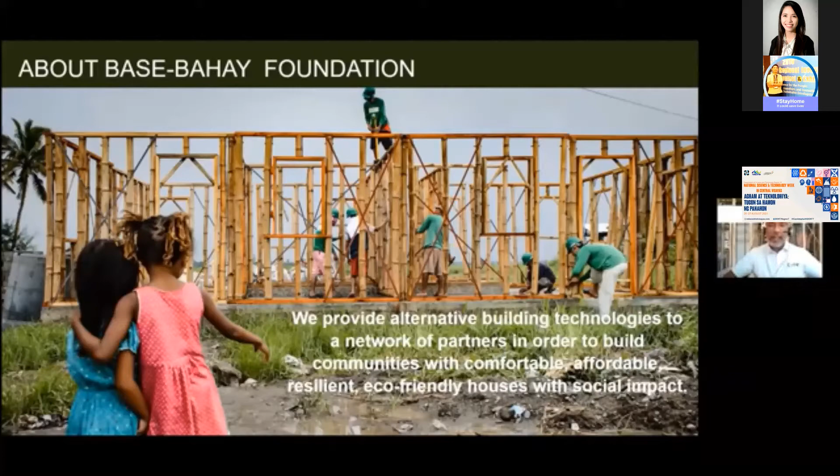Let me tell you a little bit about Base Bahay Foundation first. Actually, the topic bamboo is very close to my heart because bamboo is a material of our advocacy in Base Bahay. We are a non-profit organization and we provide alternative building technologies to a network of partners so that we can build communities with comfortable, affordable, resilient, and eco-friendly houses with social impact. Base Bahay actually started as a research project of German students in 2011. They studied bamboo, coconut, and other low energy resource materials as building construction materials. They did the characterization of the material, and then they piloted it into a house.

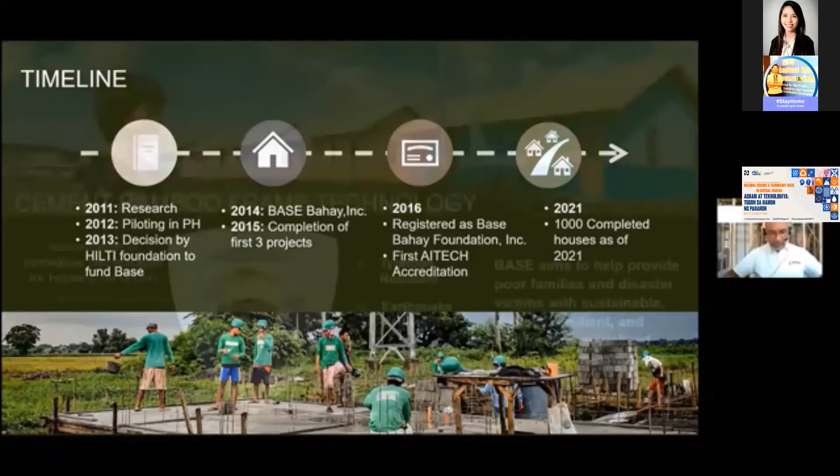Through that study, the Hilti Foundation, the CSR arm of the Hilti Group, decided to create Base Bahay. And from there, we started building houses, socialized housing, housing for the poor. And now in 2021, we have already completed more than 1,000 houses all over the Philippines. I will show you some video and pictures of some of our projects. The technology that I'm talking about is an eco-friendly, green building technology because it uses bamboo in its entirety, and we call it the cement bamboo frame technology. The building technology per se is accredited by the National Housing Authority through the AITECH, the accreditation of innovative technology for housing.

We build communities, houses for poor families, disaster-stricken communities, and the marginalized sector of the society. We build socialized housing, a house that is permanent with a lifespan, as accredited by AITECH or the National Housing Authority, of 25 to 50 years. So it must be typhoon resistant, able to resist wind speeds up to 240 kilometers per hour, earthquake resistant to a magnitude of 7, fire resistant and insect resistant, so that it can last from 25 to 50 years.

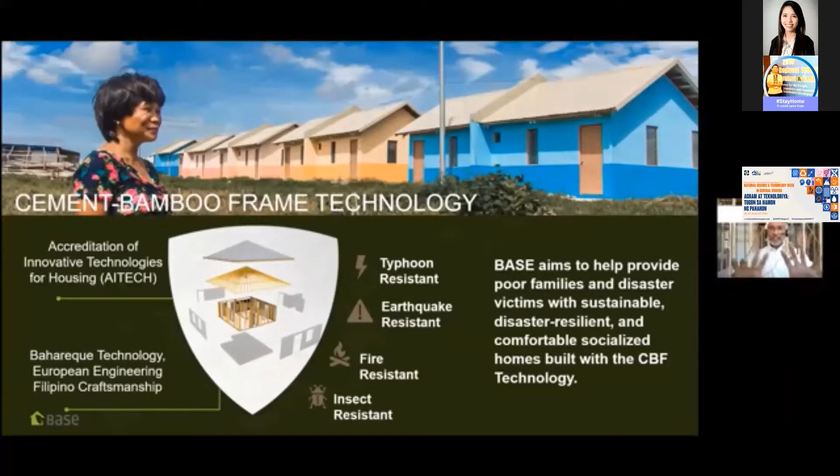Just like what I have said, this is one sample of a community in Tacloban. We have already built 12 communities like this, and we have constructed more than 1,000 houses. We have projects in Jaro, Iloilo, Lanit, Basey, Samar, Tacloban, in Kabug, in Eastern Samar, Sorsogon, and just very recently in Negros Occidental, Silay. And we are constructing more socialized housing across the Philippines. Among our ongoing projects, we have two projects in Mindanao, wherein we are now redesigning the architectural features of the houses, much different from what we have already built. We're working with groups like Hineleban Foundation, Rotary Homes, Ayala Land, and even the group of Architect Ray Villanueva in the Kawayan Collective in building their Dauin House, which I think will be presented later today.

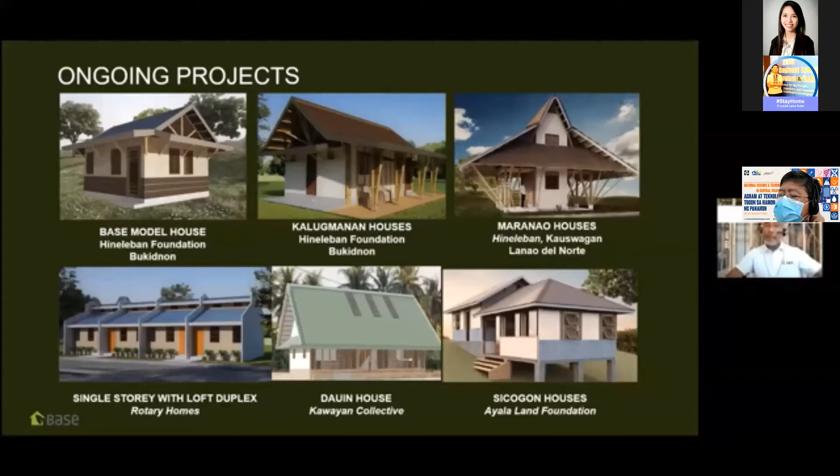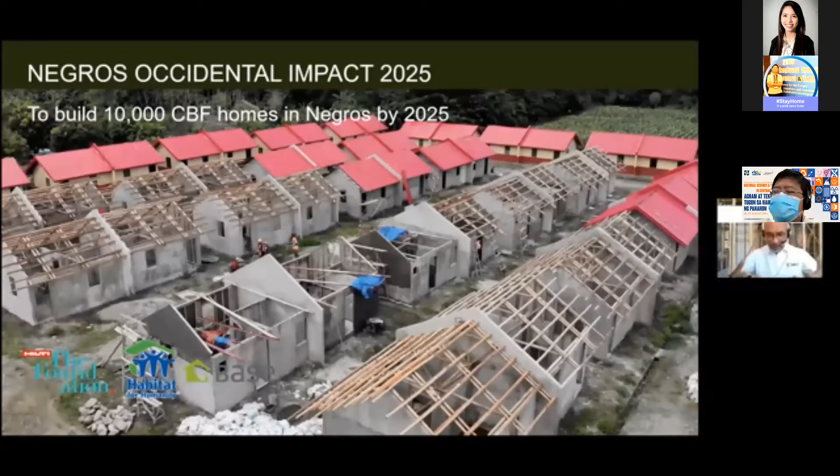As I have said, one of our biggest projects in Negros is the Negros Occidental Impact 2025. We plan to build 10,000 cement bamboo frame houses in Negros by 2025, serving informal settlers and displaced families in a resettlement area close to the urban district. Allow me to show you a 5-minute video clip of the project, the use of the bamboo material in building technology, and the social impact it brings.

I hope the sound will be okay for everyone. Here goes.

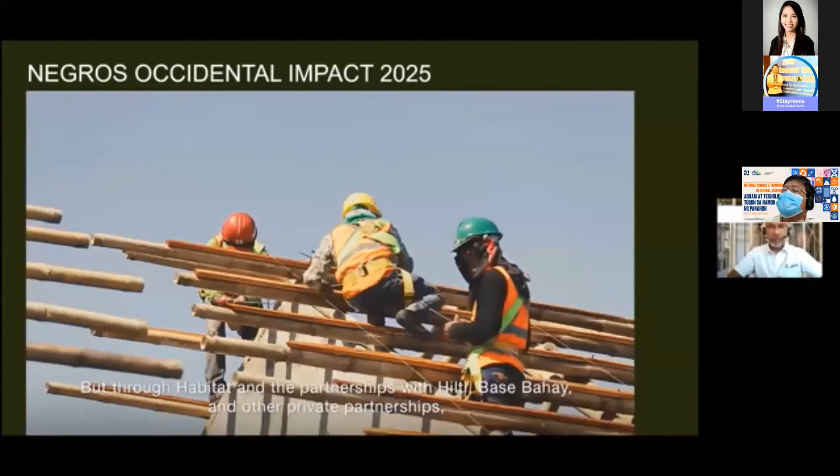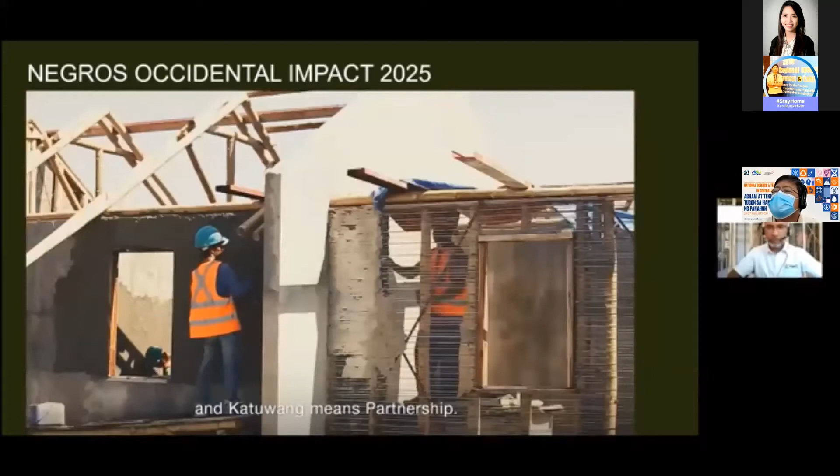When we first started here, it was just land. The land was appropriated basically for informal settlers to provide their own housing. But through Habitat and the partnerships with Hilti, Base Bahay, and other private partnerships, we're building sustainable communities. The first community here is calling itself Katuwang. And Katuwang means partnership. But partnership, it's more of a deeper partnership. It's like partnership for life.

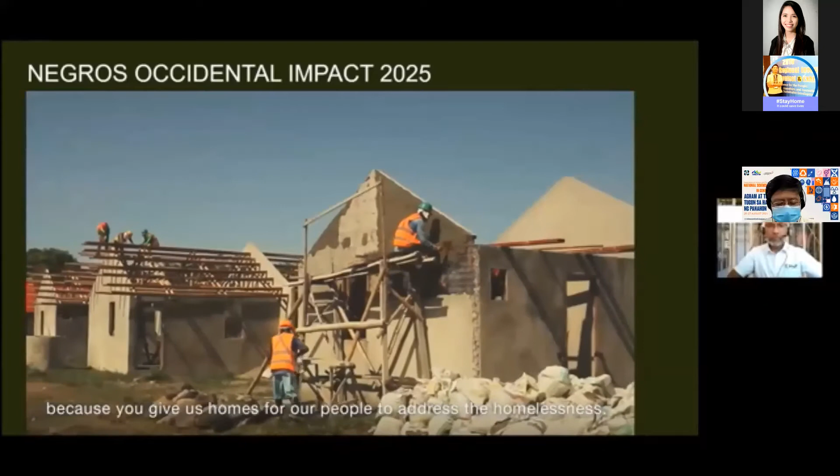It's good to be partners with Habitat because you give us homes for our people to address the homelessness, and so in return we should be helpful in what you are doing here so that we can show to other places that what we are doing here in partnership with Habitat is a good example for the city of Silay.

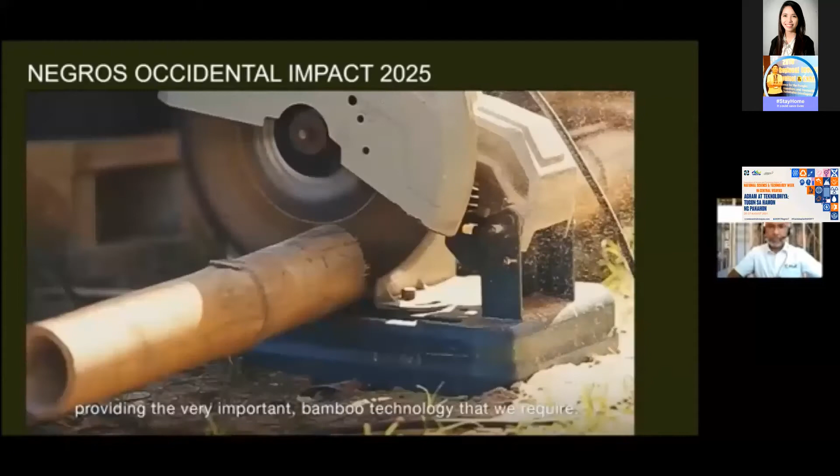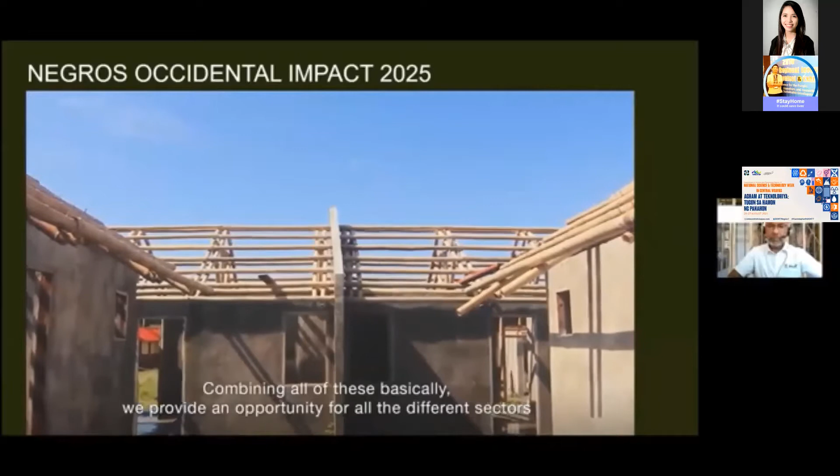So the partnership focuses basically on leveraging public and private organizations. We have included the LGU, who provides us land. We have the private sector that provides us basically funding and support. More importantly, we also have partnerships with the Hilti Foundation and Base Bahay, providing the very important technology, bamboo technology, that we require. Combining all of these, we provide an opportunity for all the different sectors in the housing value chain to contribute to eliminating housing poverty.

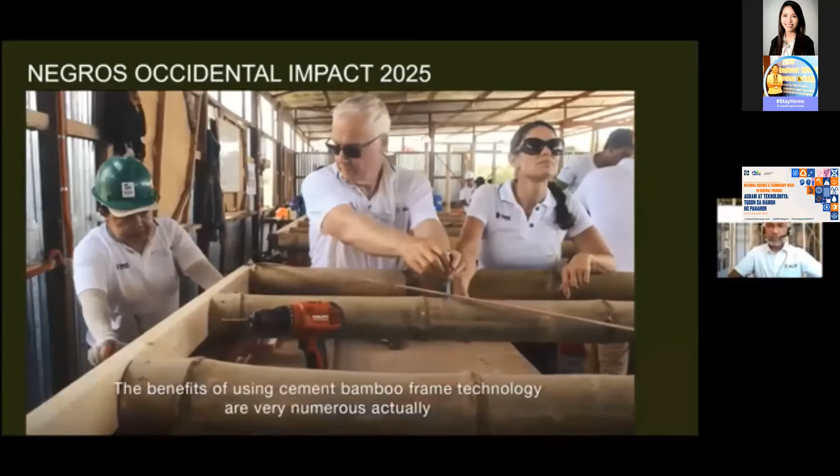The benefits of using cement bamboo frame technology are very numerous, actually. First and foremost, it provides for the building of disaster-resilient houses, which can basically withstand typhoons and earthquakes, which is very important for the very vulnerable groups. The second, it's also been proven that it provides insulation from heat, which is very important for poor families.

Third, it provides employment, not only for construction workers, but for bamboo farmers, which is very critical for the rural areas. Another benefit is the sustainability of the product. It grows very quick. So unlike wood or any other material in the construction value chain, it's easy to source, and it can also be much more cheaply sourced in the long term through economies of scale.

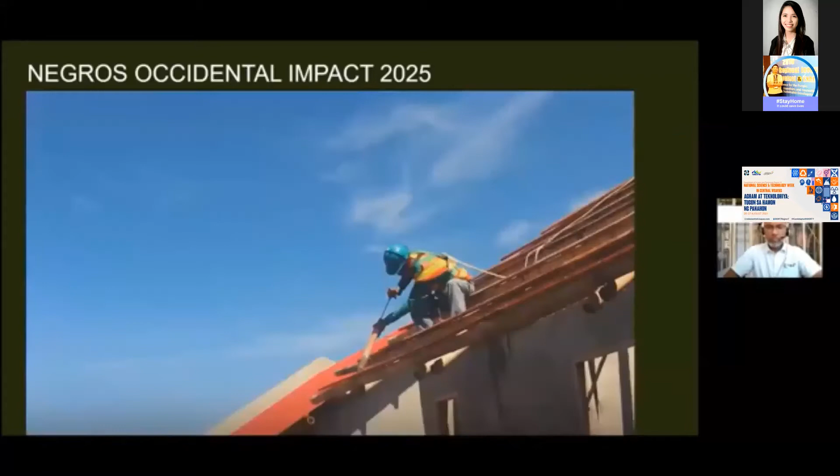Yes, it is worth doing again because it can help us through the livelihood of our city and also the people of Silay.

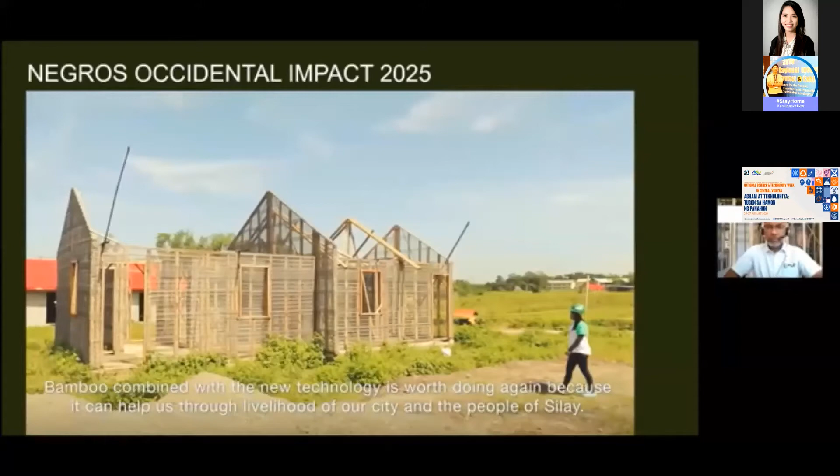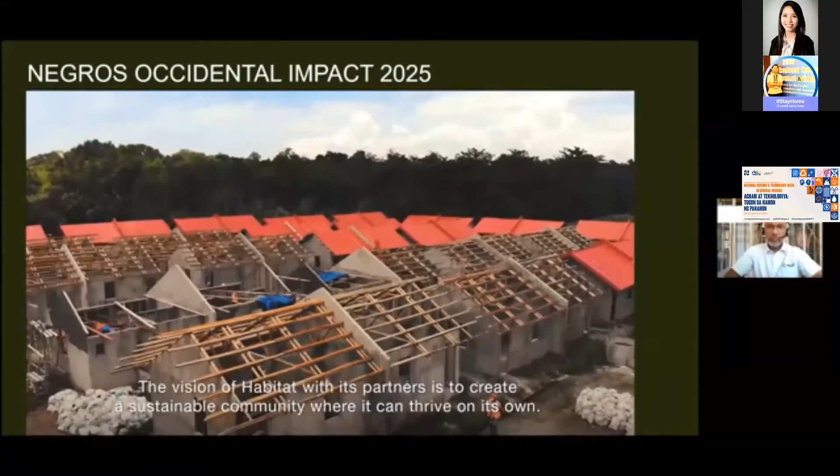竹とコンクリートですごい強度を増していて頑丈な家だと思うし、あと竹自体に殺虫の効果があってそれもすごい長持ちするのですごいいい構造だと思います。 So the vision of Habitat with its partners is to create a sustainable community where it can thrive on its own and build the proper leadership and governance to lead its way to a sustainable community.

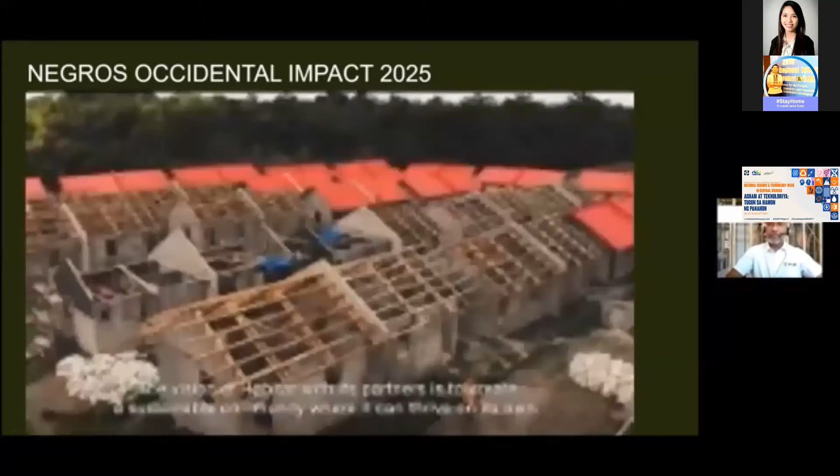I hope you like the video. Every time I look at that, it's very inspiring, the number of people and the beneficiaries and how much it means to all of them to have their own house and live comfortably in a permanent house that truly serves the convenience and the purpose that it was built for.

So the challenge for all of us, especially all of us who are listening today, is how to make bamboo mainstream in house construction. Let me borrow this slide from one of our partners in Coventry University in the UK. To make bamboo mainstream in house construction, definitely you need research. If you don't know anything about the material, you don't do study, you don't do research, you don't do pilots, then how could you possibly have that material included in the codes and standards? And if there are no codes and standards for this type of material, then how can an engineer or architect specify it, design with it, or even teach how to use it in construction?

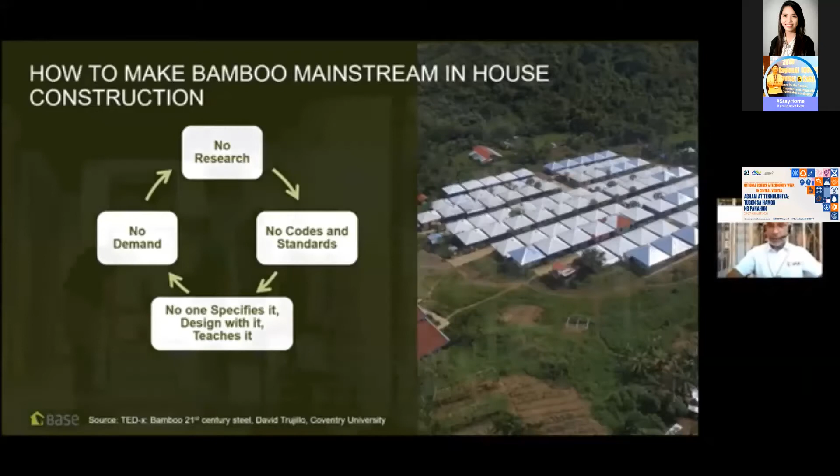For us in BASE, we just recently launched the BASE Innovation Center. We focus on research and technology adoption, and we make sure that whatever the result of our study, it is transferred to the community where it is needed. So training and learning is a vital component in the delivery of the results of this R&D.

Right now, we are in partnership with many different groups. BASE Innovation Center is fully funded by Hilti Foundation. But to do research, we are working with local universities, the likes of De La Salle and UP, to name a few, and partnering them with top universities in the world, among the top 5, ETH Zurich, Hong Kong University of Science and Technology, to name a few, and put them together, work on a specific topic, and elevate the use of bamboo in different kinds of construction.

We are also working with different institutions, including the biggest design firm, ARUP, or the Habitat for Humanity Terwilliger Center for Innovation in Shelter, to forward this ambition. We're also working with social enterprises, the likes of Kawayan Collective, the group of architect Ray Villanueva, to do study, to do building, to do research in this area. So these are a few of the strategies of how we would like to make bamboo mainstream.

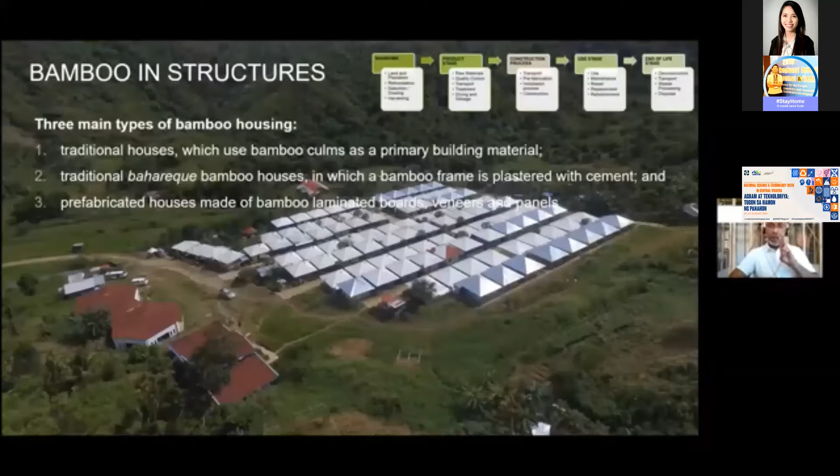Actually, for structures, there are 3 types. You have the traditional Bahay Kubo. There is one method called the Bahareque, or in Filipino, it is Tabique Pampango. It is a bamboo frame plastered with cement, as you can see in the middle picture. And then another type are those prefabricated houses made of highly engineered laminated boards.

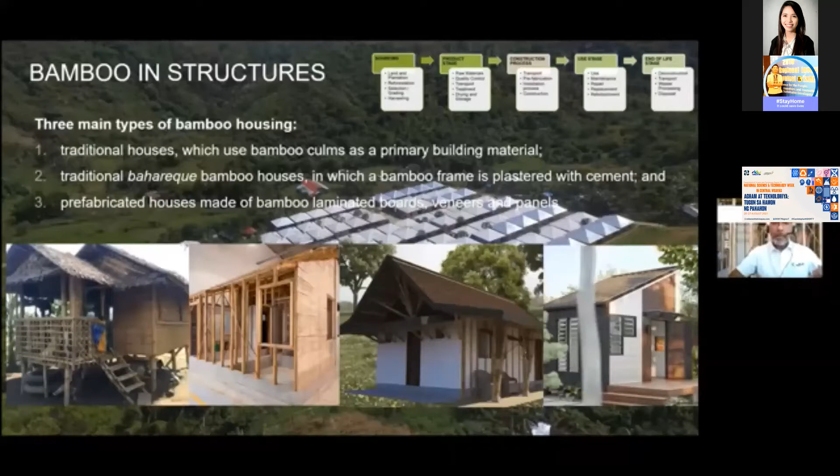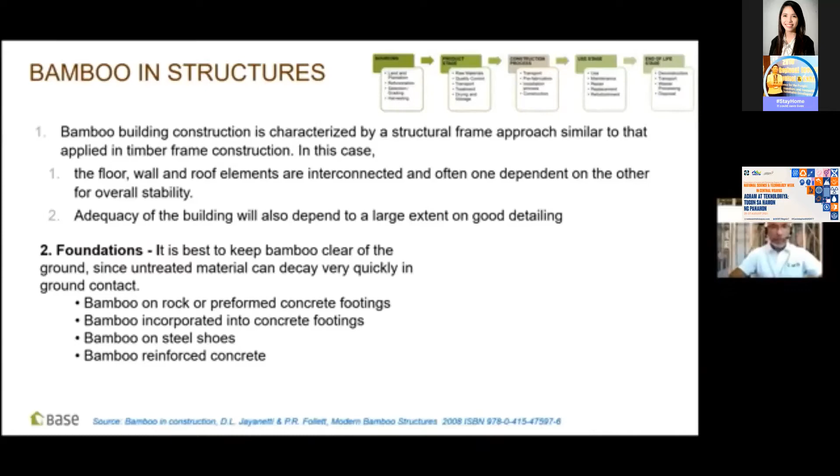The one that I'm going to discuss with you is the Bahareque technology, or a construction using bamboo as the structural frame, wherein the design is very similar to your timber frame construction. The floor, the wall, the roof elements are interconnected with each other. For the foundation, you can use any type of foundation that suits the site. For the flooring, it could be an earth floor structure, or it could be reinforced concrete, depending on the house that you're building.

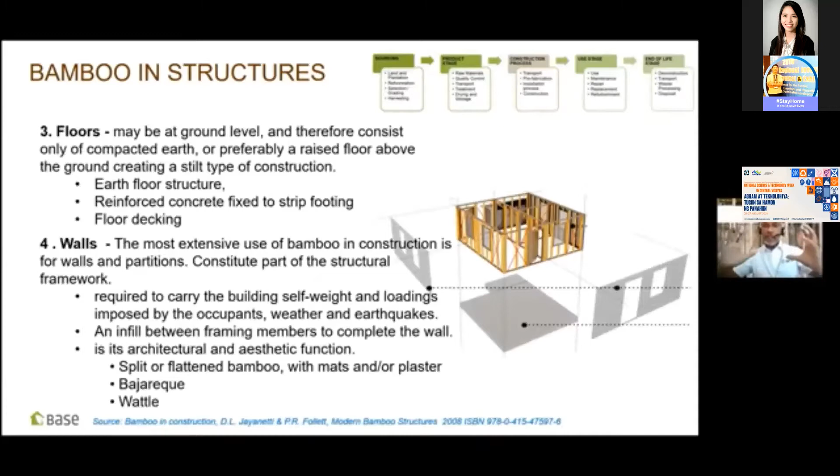The walls practically carry the entire self-weight and loadings imposed by the occupants, weather, and earthquake. And then there is an infill between the framing members to complete the wall. And for the roof, you should have a roof structure that is capable to resist a typhoon wind speed of about 240 kilometers per hour. The roof coverings are non-structural in function; you can use different types of materials, including bamboo tiles, bamboo shingles, to name a few.

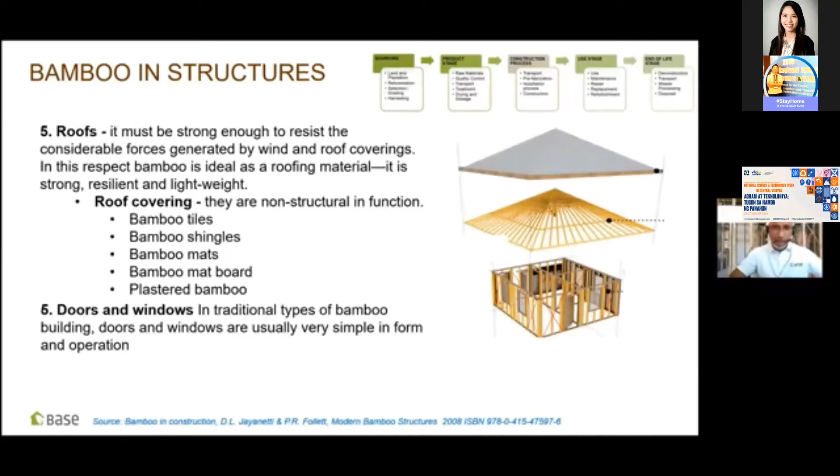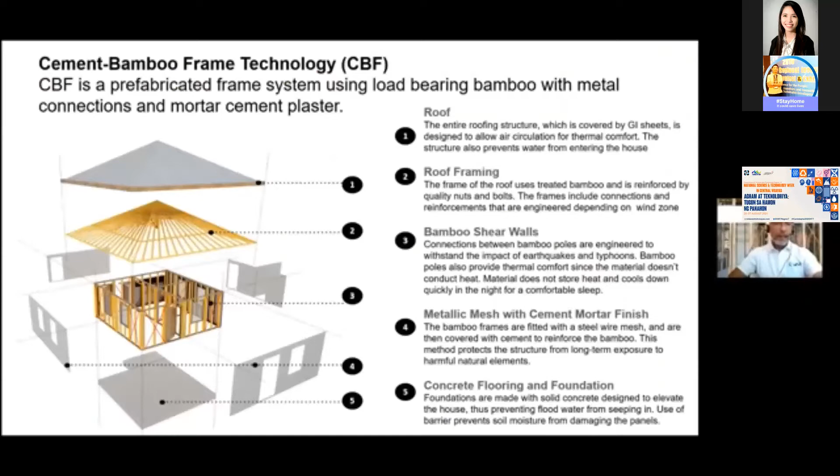Doors and windows, it could be your traditional type, or it could be the one you can buy easily in many hardware stores. So if you assemble this into one, like a bamboo shear wall with cladding and finishing with roofing, this is what we call the cement bamboo frame technology. Probably you'll be asking, is there a design for this?

Just recently, in June this year, the International Organization for Standardization released ISO 22156. There is now a code on how to do structural design of this type of structure, wherein the primary load-bearing structure is made of round bamboo, and the way it is configured, it is a shear panel system. It can be applied to 1 to 2-story residential, commercial, or light industrial buildings not exceeding 7 meters in height. So the detailed load design, the method of design is stated in ISO 22156.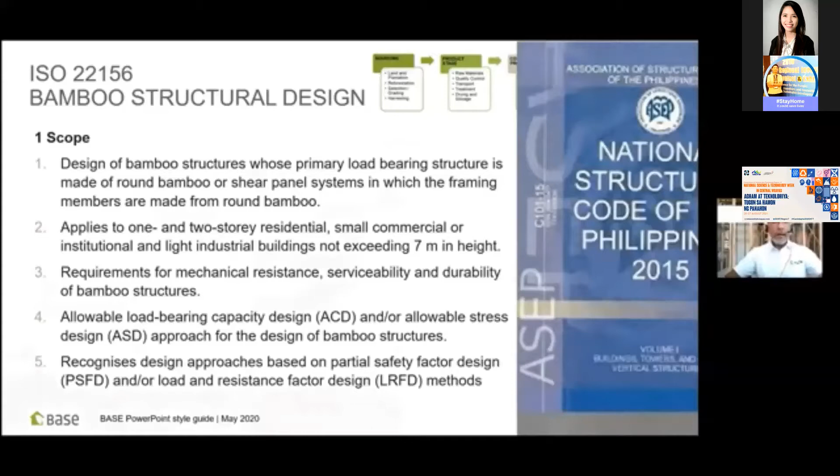We also would like to show to you that we tried to test this also, especially on safety, risk, and resilience for typhoon. And we tested 3 model houses in the area in Bicol where it is frequently visited by typhoons. And so far, very little damage to our model houses in this region.

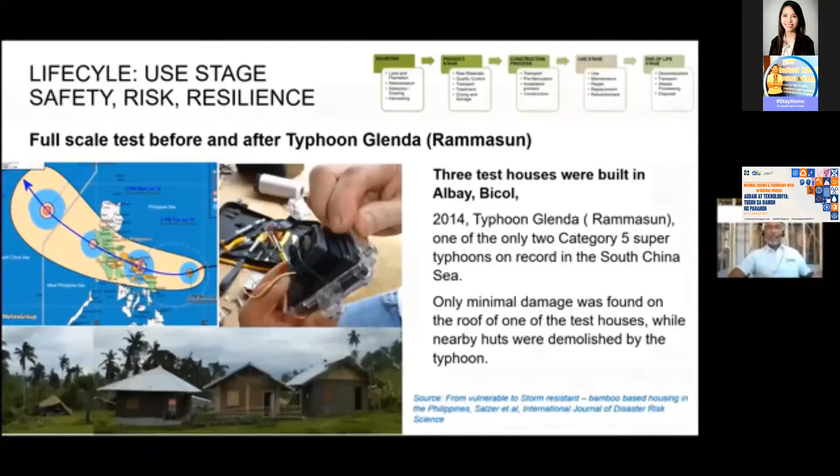One last question that you might be asking: what is the cost comparison if I'm going to compare this type of technology with a conventional CHB or concrete hollow block? Just to summarize this slide, the technology using the cement bamboo frame is actually 37 to 38% cheaper compared to your conventional CHB houses.

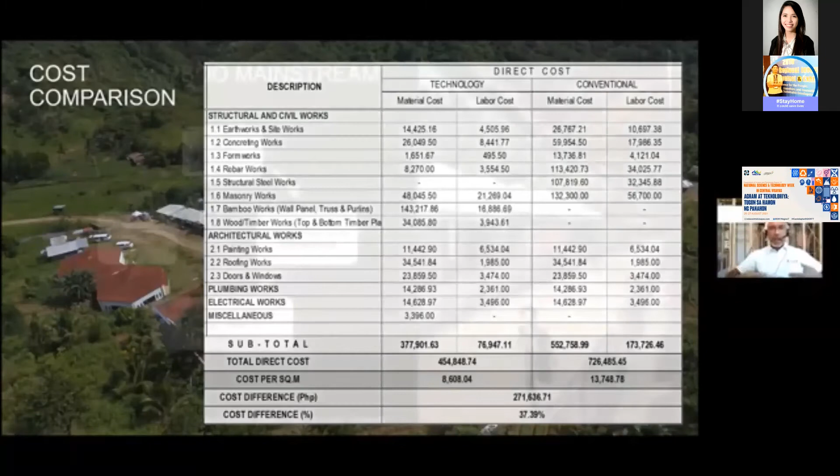So it started with a research. Now we have a code and standard. And now we can start specifying it, designing it, even teach it because we have the complete knowledge. And then we start creating demand.

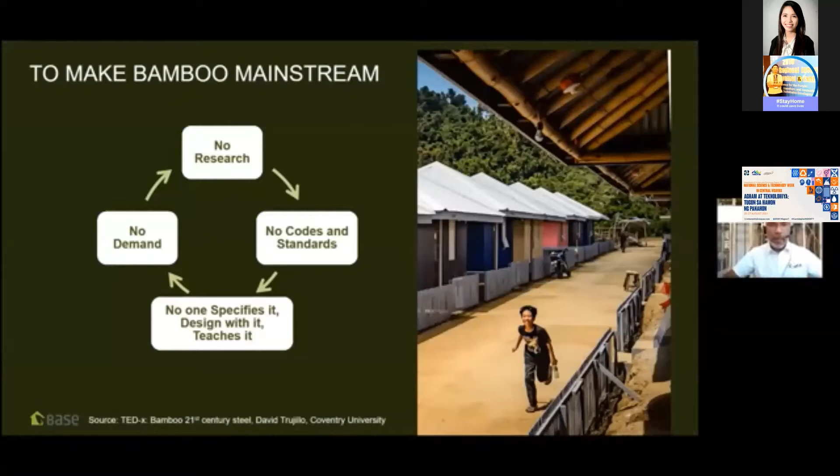The way you saw the beneficiary react to having a house that is comfortable to live and of high quality is actually very inspiring. So demand is created, and therefore we can continue developing this technology through research and further standards. In closing, I just would like to show you how it looks when you build this type of houses.

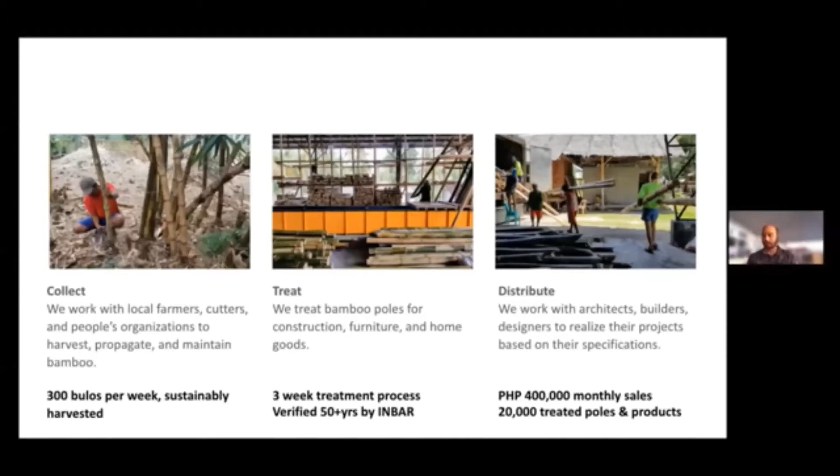Excuse me. So here's a quick video about our treatment process. This will highlight numbers 2 through 6 here of our process flow. So let's take a listen.

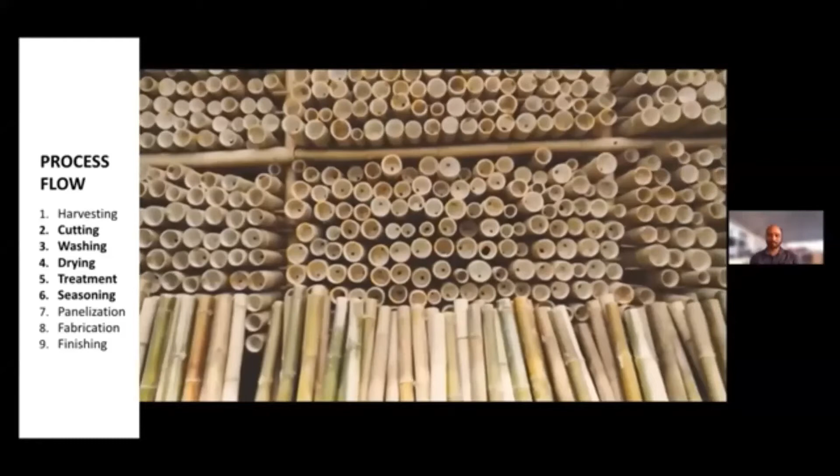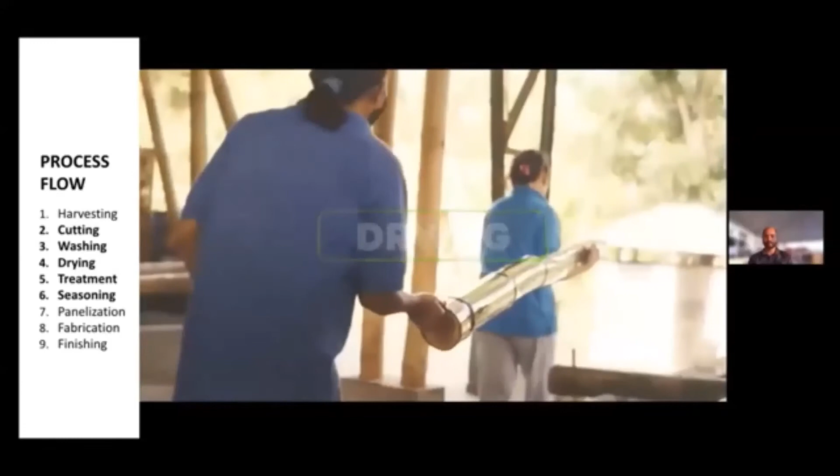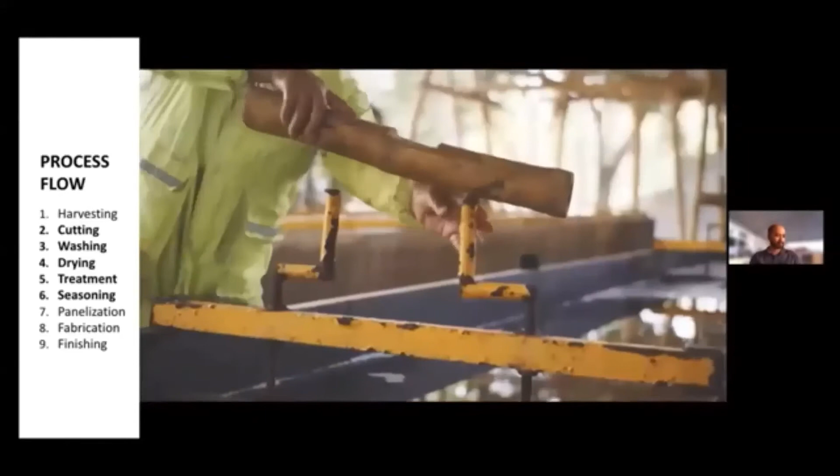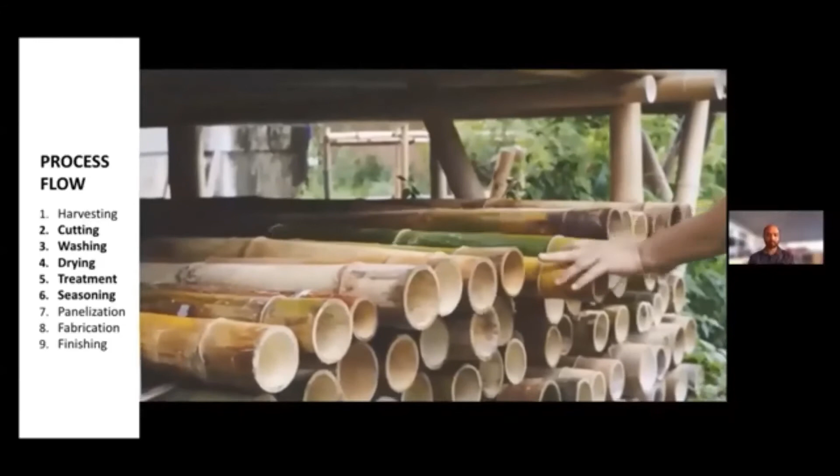At Kawayan Collective Bamboo Treatment Facility, we believe in the long-term beauty and durability of bamboo. To ensure our bamboo is powderpost beetle and termite free, every piece must go through a 4-step process. Step 1. Washing. Bamboo naturally contains a lot of starch. By submerging the fresh-cut bamboo completely in running water for a few days, we are able to remove the starch that the powderpost beetle finds so tasty. Step 2. Drying. By sun-drying our poles for at least 5 days, we reduce the moisture content of the pole to about 33%, thereby preparing the pole to absorb the maximum amount needed for treatment. Step 3. Treatment. Every pole is fully submerged to absorb the maximum amount that's needed. We use a boron or permethrin solution, and this is the final guarantee against termites. There is no waste in our process because the poles go into the solution already cleaned and dried so that the treatment never needs to be replaced, only added to as the poles soak up more solution. Step 4. Seasoning. Finally, all our treated bamboo is carefully stowed in covered storage racks that allow for airflow while keeping the bamboo out of the sun and rain. Treated bamboo will last as long as any treated wood. With proper design, bamboo will last a lifetime and more. We guarantee it.

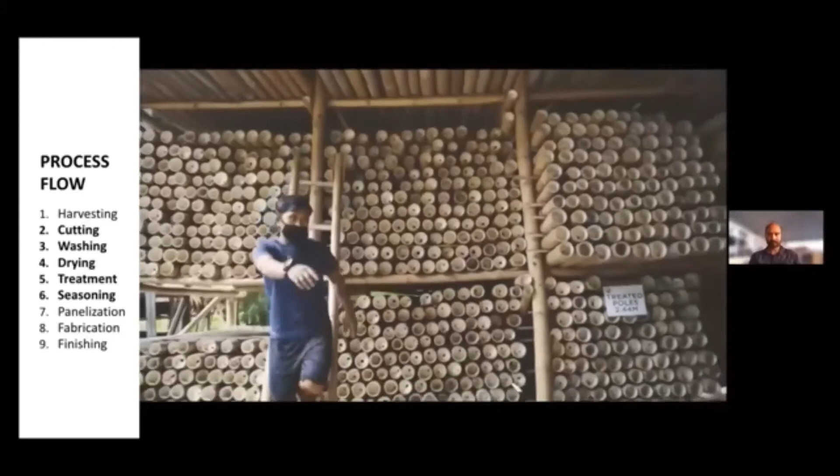So as you can see, our process is very thorough. It's brought over by Base Bahay. They've done years of research and treatment and created this 3-week process that's internationally renowned. And through the supply of treated bamboo poles, we believe that we're the number one supplier in the region. And we think that the bamboo is durable, sustainable, and also great because it's locally sourced.

This latest global pandemic has shown that supply chains can be disrupted, and hopefully people take more notice about local production and the value chain of their products. So we believe that we can also be competitive on price with steel and concrete, if bamboo, like we said, can last a lifetime, and our mission is also to train people to build with bamboo. So more on that later.

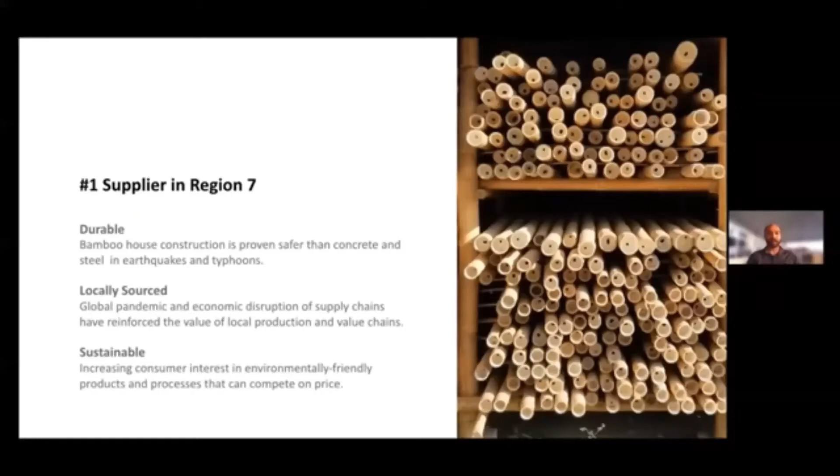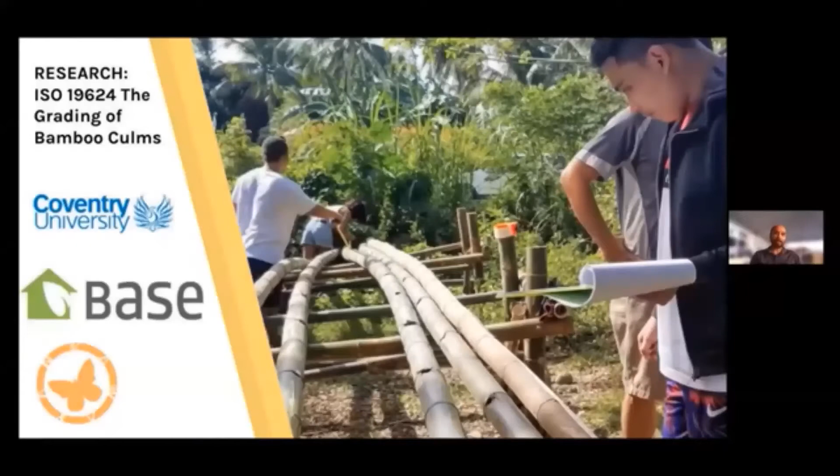But right now we're also furthering our grading procedures at our facility by complying with ISO 19624, the grading of bamboo culms. Together with Base Bahay and Coventry University in the United Kingdom, and also Foundation University, we're undergoing a study to make our poles internationally competitive. After we're done with the study, we'll be the first facility in the world to have bamboo that is graded to this international standard. So we're very excited about this and hope that will increase prospects internationally and also get more people building with bamboo and knowing that they can trust the material.

So here are a few projects. After the first year of processing, we were only processing for Base Bahay, and right around when the pandemic started, some of their projects slowed down, and so we had to find other clients. And so here are a few projects around the region. This is in Dauin, a residential house. And here in Bohol, we have a restaurant where we prefabricated some of these screens and also a lot of the bamboo inside for this House of Lechon, working with Common Sense Architects, which is based in Manila.

Some of the prefabrication that we did. And then in Cebu, outside of Cebu, Consolacion, this is with the Cebu-based architect M+S Studio. It's a very Balinese type of structure. It's a mock-up for a larger resort that will be in Palawan. And then some local structures.

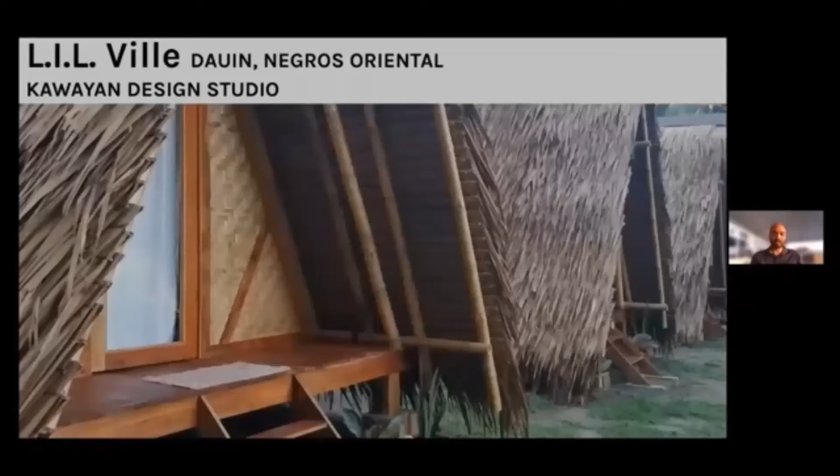We're very fortunate that there has been the demand even on Negros for treated bamboo. People want their bamboo to last, and we're happy to supply them. So after the pandemic started, we were really hard-pressed to find more clients. And right before the pandemic started, we posted this Facebook post about free bamboo for the community. If you were close by, hopefully you got some.

But we had huge piles of bamboo that didn't make the grade. Our standards are really strict, and we want the bamboo homes to be really solid and comply with all the great engineering research that Engineer Luis and Dr. Rogelio are doing in Base Bahay. So this is the pile that didn't make the grade. So we saw this as an opportunity during the pandemic to really develop other products.

And so during the pandemic, we developed our panel line. So now we offer engineered bamboo panels and also specialized bamboo products. So this is our current product line: treated bamboo poles, engineered panels, and some product development. So we do product development with anyone who's interested and has an idea to develop.

For instance, Common Sense Architects, who did the Bohol project, they had some home goods. The example on the right here is a fruit bowl that they had an idea for, and it's a beautiful handcrafted fruit bowl made of offcuts. So all of our panels and all of our products are made from offcuts of the treated construction grade poles.

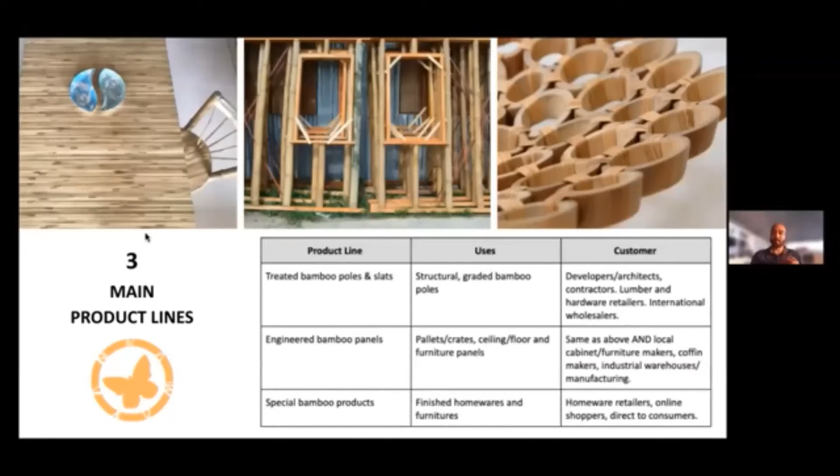So this leads to: what is the bamboo value chain? And for me, I think the bamboo value chain involves 2 things. The material itself, how it is a sustainable, rapidly renewable material. It can regenerate itself every year and lock in carbon and sequester carbon. So bamboo is known internationally as a very sustainable material.

But also, the value chain is what we see every day in our facility with the people and the lives that it touches. So in every step of the way, coming from the mountains, we hear stories of how Kawayan Collective and our processing center has changed people's lives by giving them opportunity. So giving farmers extra income during the off season, or allowing the breadwinner of a family to stay close by rather than going to Manila or Cebu to earn their wages. It's really given our community a reliable source of income.

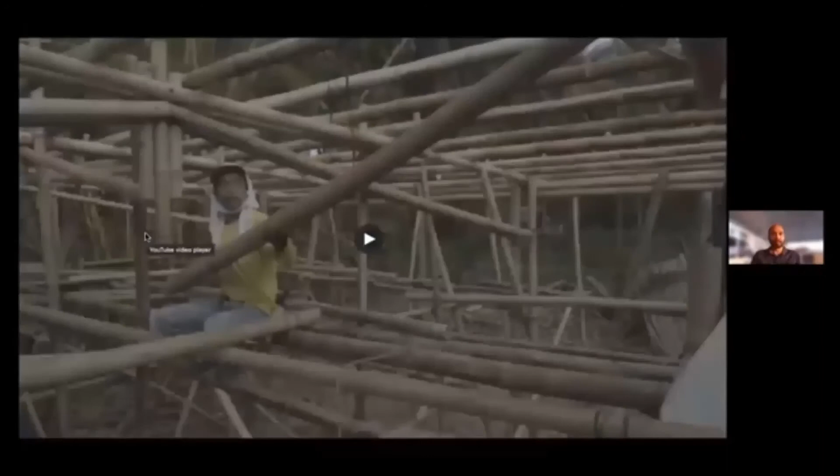So here's another quick video that I'd like to play that shows how our business is affecting the lives of our community and how it is a model of community-based bamboo processing. We use the hashtag the butterfly effect, and I think that it's important that we realize that the butterfly effect is the idea that a small ripple can have many effects down the road. So I'll play this video real quick.

People often ask, why's your logo a butterfly? It is a symbol that means many things to us, but mostly it is a reference to the butterfly effect, when one small change in behavior can ripple to make a big impact. We also like to call it the bamboo effect, and this is what it looks like.

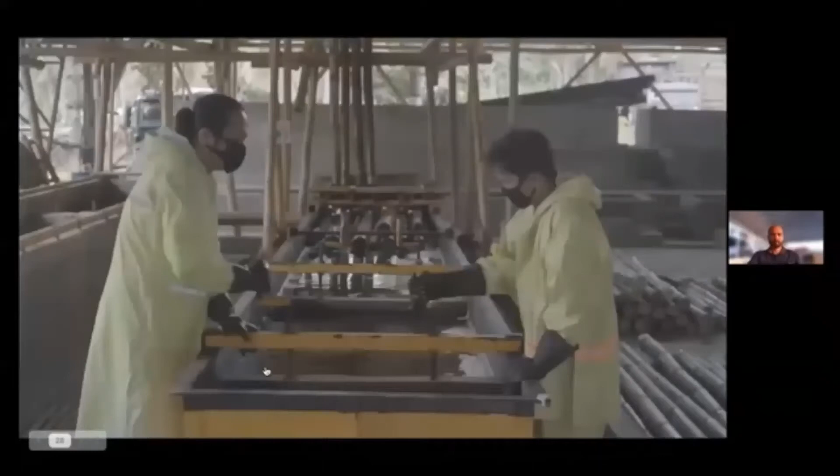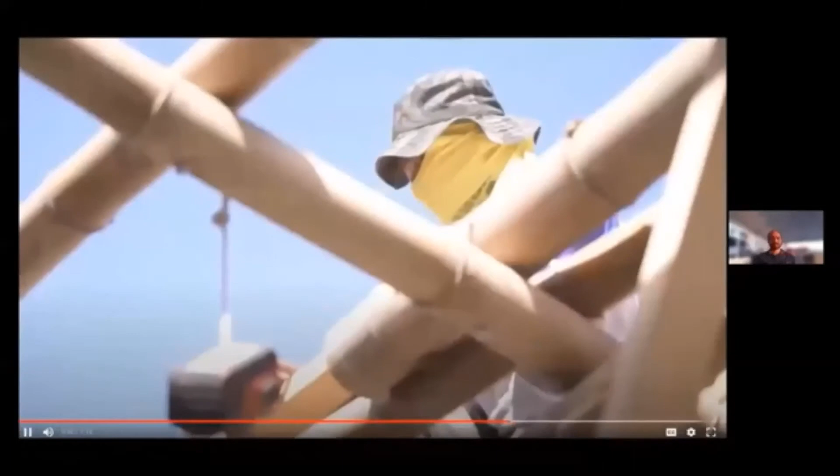Over half of all the poles treated by Kawayan Collective are used to build socialized housing for NGOs such as Gawad Kalinga and Habitat for Humanity. In partnership with national NGO Base Bahay, Kawayan Collective helps to supply new homes every year for poor and homeless Filipino families. When you buy from Kawayan Collective, you are helping to build better homes for all Filipinos.

Okay, great. So I think that video really summarizes our intent for Kawayan Collective and how we're trying to stimulate the bamboo value chain, and in the process, use as much of the bamboo as we can, sustainably harvest, but also create sustainable livelihoods along the way. So that includes all the way from supply, our harvesters that bring the bamboo all the way down from the mountains, and then the processing jobs that we're making. Like I said, we have about 25 full-time, 35 total, so people that are also part-time that we hope to convert soon. And then the market.

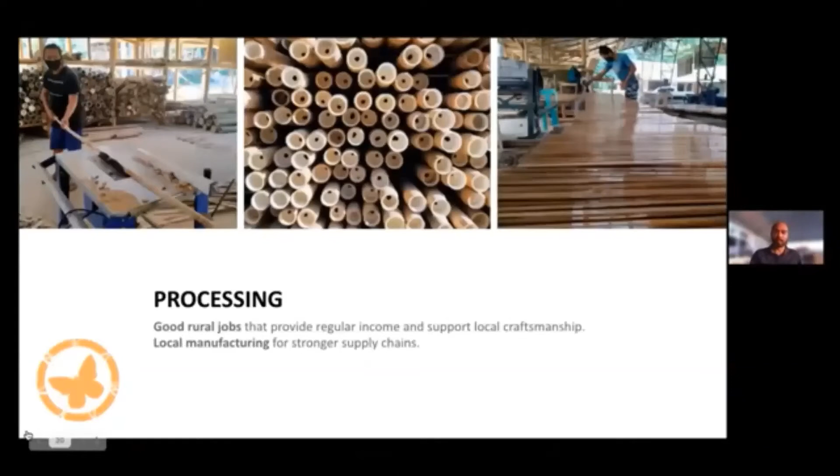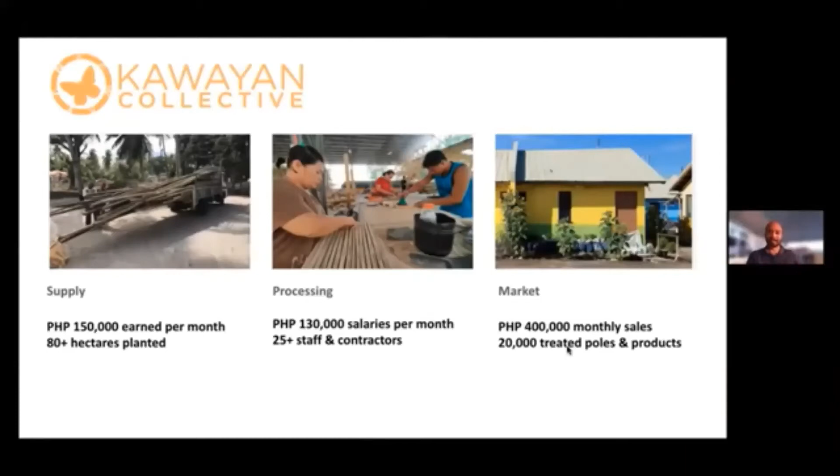So I also really want to thank our regional DOST for this year. We were awarded a grant-in-aid, which is going to help us further expand our offerings and product development. We're going to be able to upgrade our equipment, but also invest in a bamboo learning center where we can hold trainings and get more people involved in our value chain, doing pre-processing of bamboo and other exciting things.

This year, we're also going to do a cooperative conversion. So converting our business model to a cooperative so that the community takes ownership and more of our business touches more people in our community, and hopefully growing our business in that model, expanding maybe to other places, but really making the business take root, and also more of our team to take ownership and realize that it's theirs and they have the power to make it whatever they want it to be.

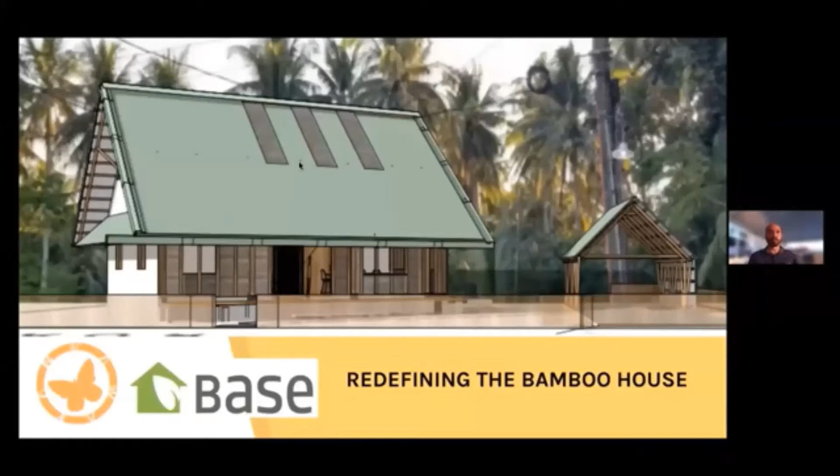And then at our facility, we have 8 more units that we're going to build, all for different income levels, so that we can really use them as a model, so people can come to our place and look at these different models and see how they're built, and also along the way have trainings while we build these houses so that more people know how to build with this technology, so that when people come in, we can refer other builders to them and have them build their project, because we want to continue to expand our impact beyond our community to builders and also to architects.

We continually refer our work to architects all over the country, and also to builders, because we can't build everything. We just want to make sure more people work with bamboo.